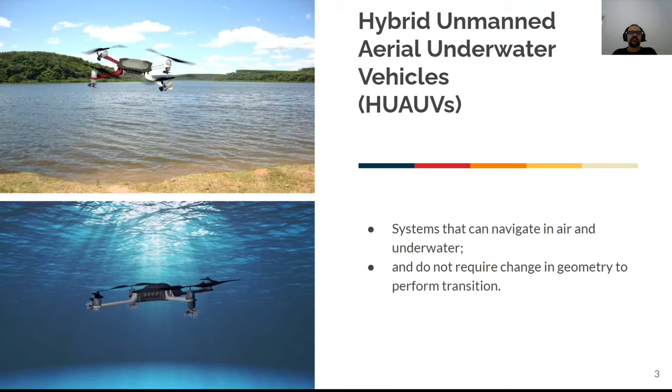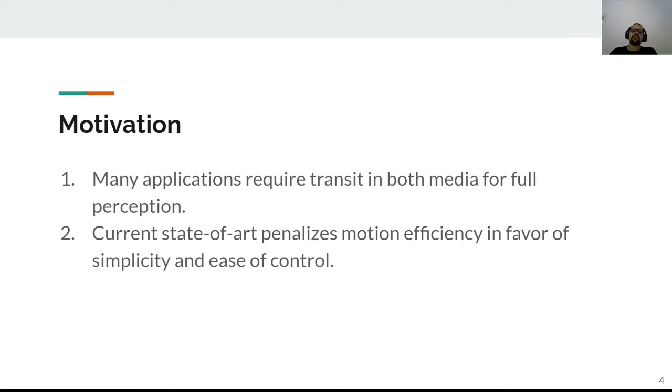Our motivation here is that many applications require transit in both media for full perception, such as search and rescue, environmental research, and inspection of partially submerged structures. So these vehicles are really needed, but the current state of the art penalizes motion efficiency in favor of simplicity and ease of control.

So our problem in this work was to design a new concept of a hybrid vehicle that focuses on both aerial and underwater performance.

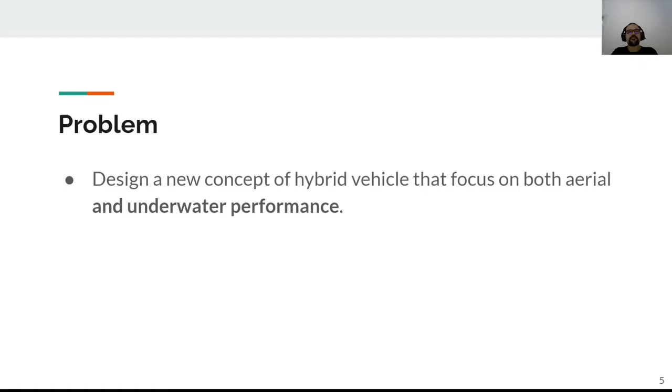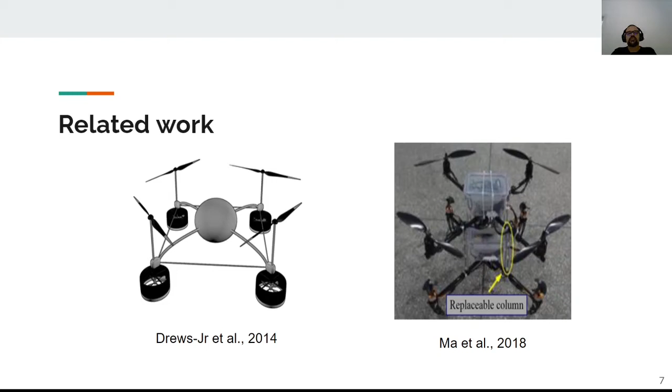Now I'll show you some of the related works. On the left, we have the first concept of modern HUAUV, which was proposed by Drews-Jr et al. from 2014. On the right, we have the first transmedia-focused concept, which was proposed by Ma et al. from 2018. Both of them have 4 aerial propellers and 4 underwater propellers. The second one has also 2 frames.

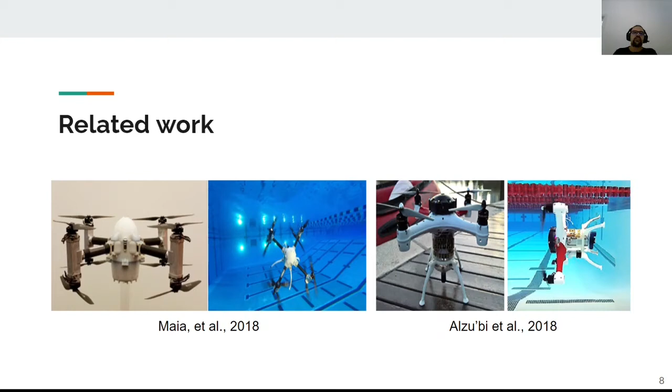Now I'll show you 2 of the most recent proof of concept prototypes. On the left, we have the Navigator, which has 8 coaxial aerial propellers. And the second one on the right is the Loon Copter, which has 4 aerial propellers plus a ballast, which is a system that fills with water in order to control the buoyancy. Both of them need to turn 90 degrees to move forward, which is not a good thing because you have a larger drag force on the vehicle.

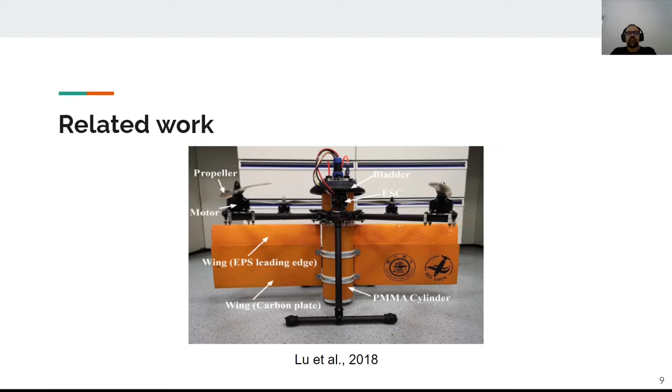And the last one is a 4 aerial propeller with fixed wings and a bladder for underwater glider motion. It is a concept that combines UAV with underwater glider and is really different from the others. So you may notice that none of these concepts has forward-facing propellers. And this is a great issue because they have high drag force due to large area normal to the vehicle motion.

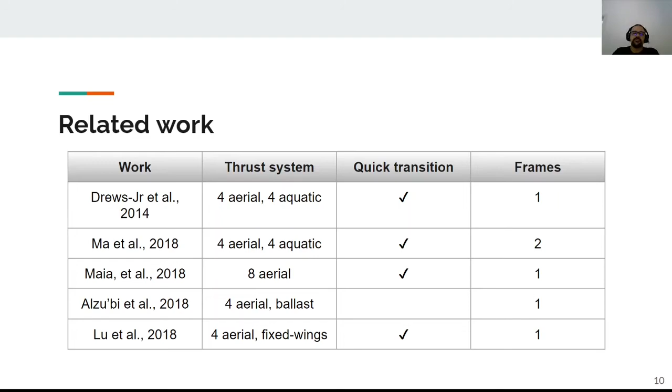Since it has forward-facing propellers, it has a lower drag, but it has no roll angle control underwater, relying only on static stability and moving like an Ackermann vehicle. It also has a positive buoyancy.

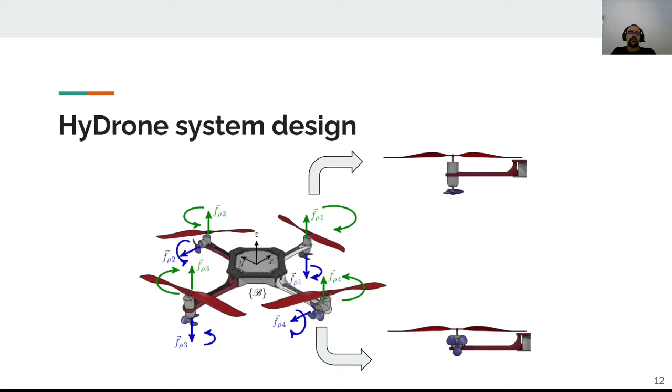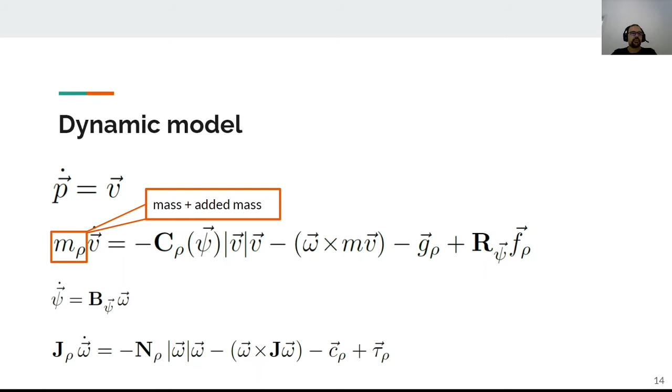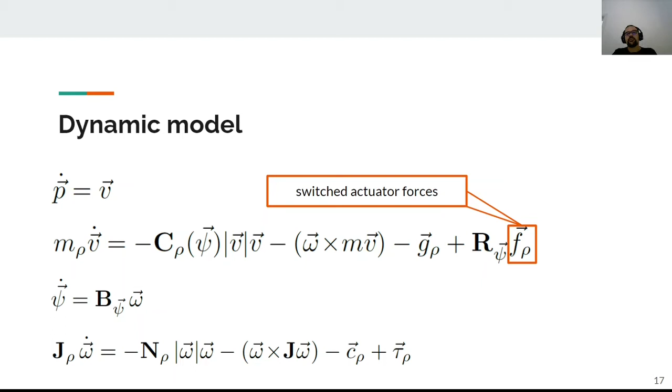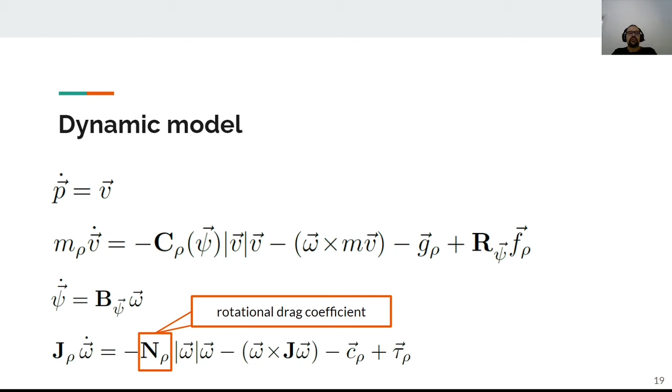This is our dynamic model. It has some specificities, which I'll show you now. Some of them is the mass plus added mass term, the translational drag coefficient term, the net weight, which is due to buoyancy, the switched actuator forces term, which is due to two separate systems, one for the air, one for the water. The inertia tensor plus added inertia term, the rotational drag coefficient term, the rotational static stability term, and the switched actuator moments term.

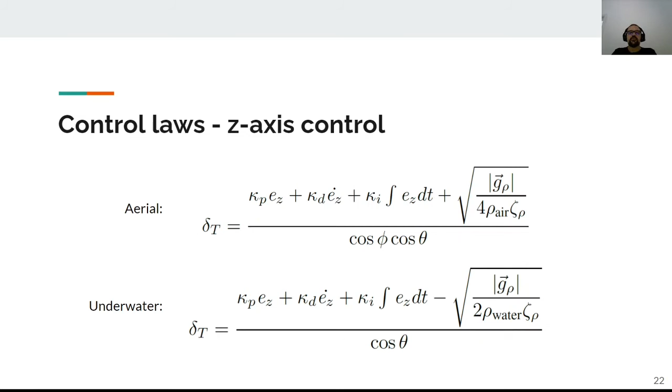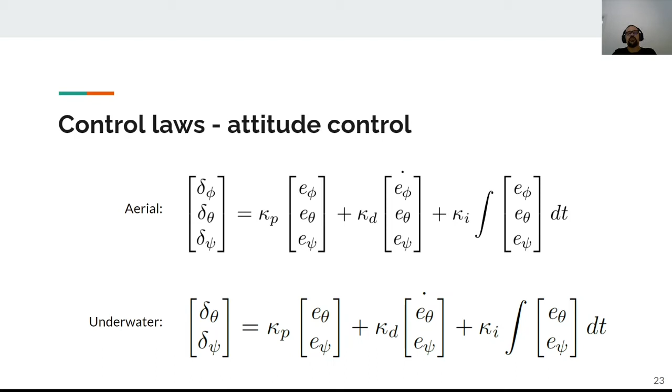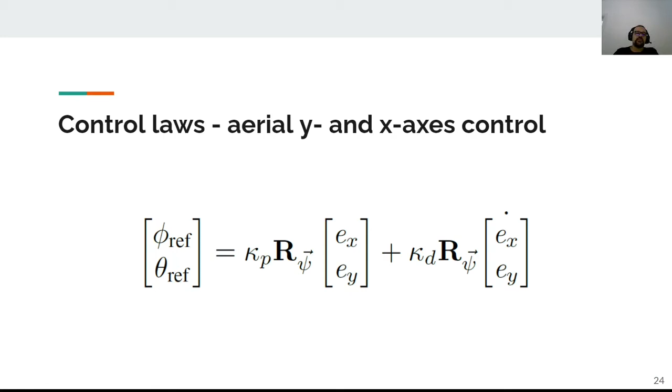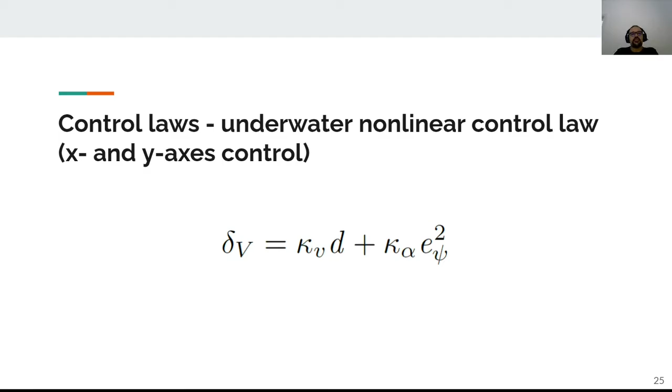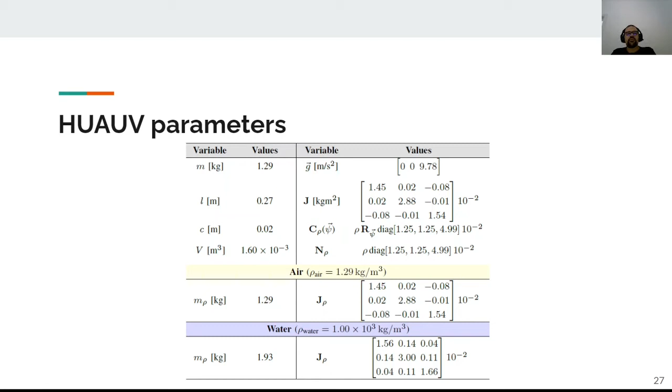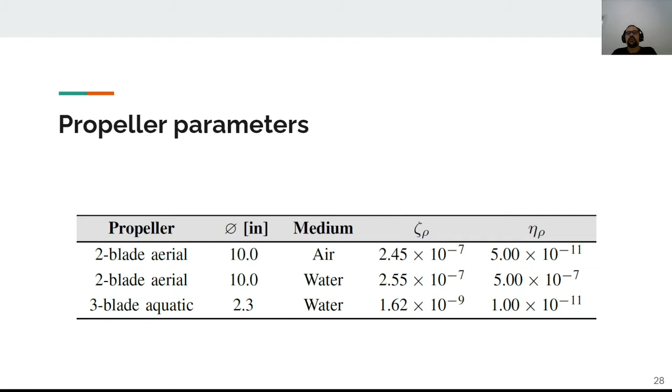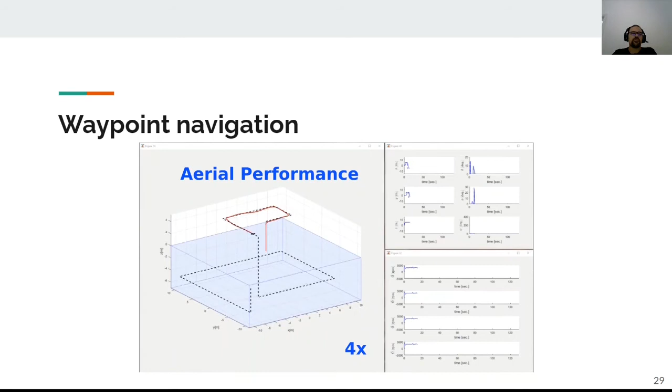I'll show you first our waypoint navigation simulation. Our vehicle motion is like a classic UAV on the air, and underwater is able to navigate with the two forward-facing propellers. It gives a higher speed, lower drag, and you may also notice that we have the switched actuator on the bottom right corner.

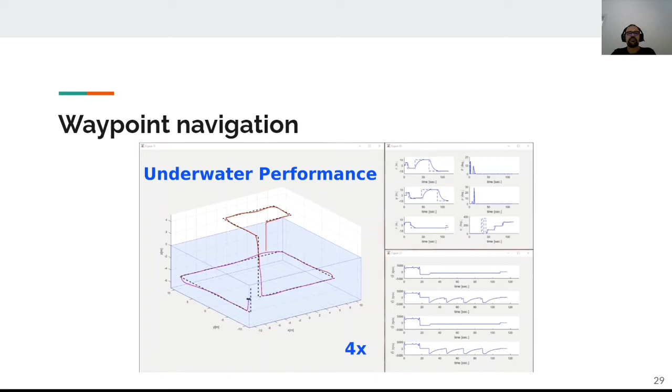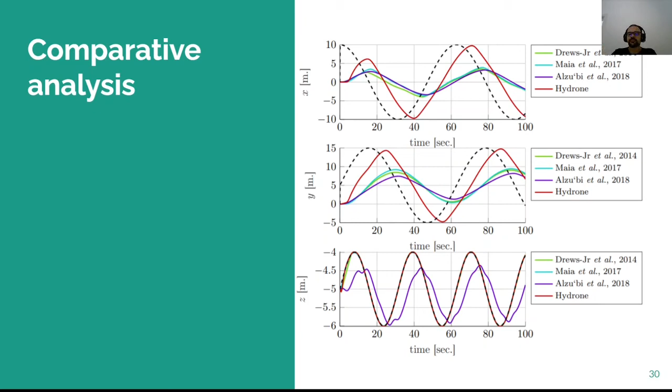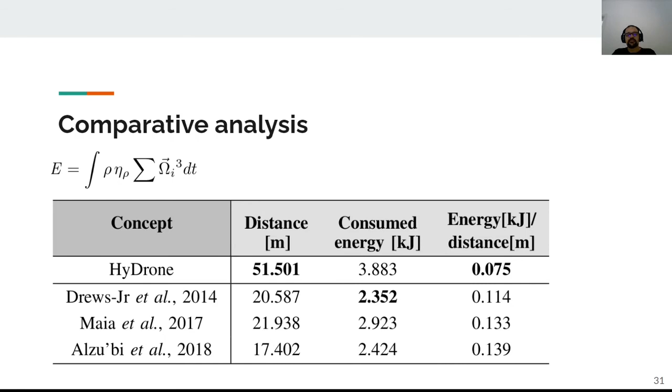So our conclusions and future work: our proposed concept, Hydrone, maintains aerial quadrotor performance. It has better hydrodynamics than the current state of the art, so it has a higher underwater energy efficiency. And it relies on static stability and non-holonomic kinematics.

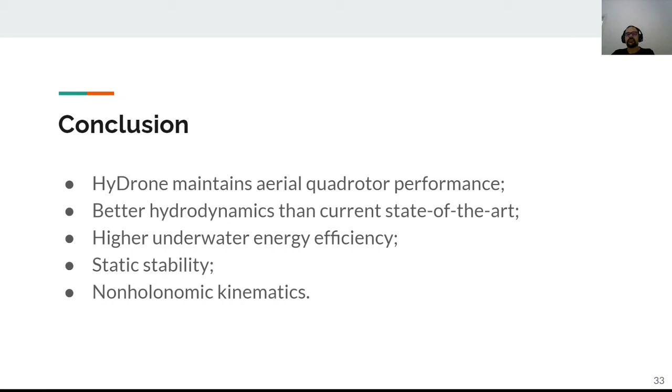For our future work, we'd like to build and evaluate a prototype in real-world applications. We are currently working a lot on this. We will also design a robust control strategy to guarantee the stability under disturbances.